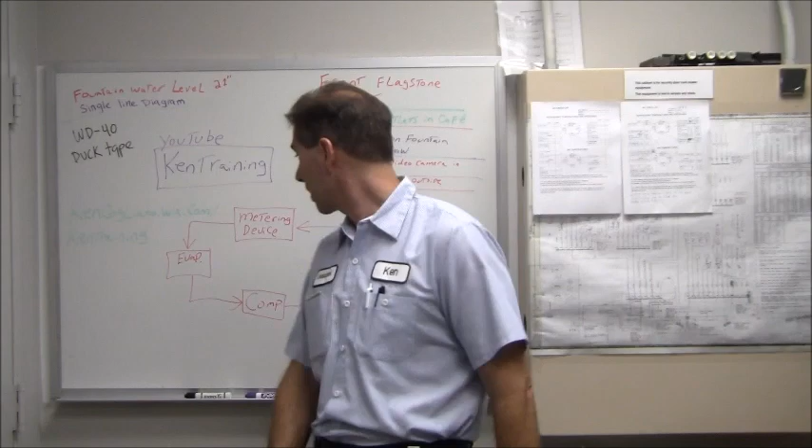Before I get into the sheet, let's go over the basic refrigeration cycle, so you have a basis of what to look for. When we fill out the sheet in the field, you need to know what components to look for in order to place your gauges and temperature probes correctly, and understand what you're trying to achieve. Every unit looks slightly different, so you have to look at the piping to figure things out. I've got the basic refrigeration cycle right here, and it's also on the sheet, but I'll give you a brief explanation.

I always like to start at the compressor. The compressor is the heart of the machine—it's the lifeblood, or the pump.

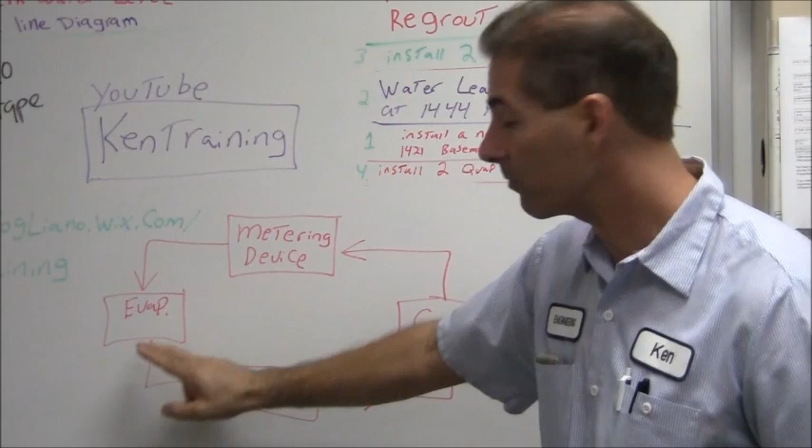Let's talk about the four main components, their names, and what each does individually. First is the compressor, which goes to the condenser. The condenser goes to the metering device, then the refrigerant goes to the evaporator, and back to the compressor. These are the four main components—every refrigeration cycle has them, otherwise it's not a refrigeration cycle.

Now let's talk about each component individually. The compressor takes in low pressure, low temperature vapor refrigerant and compresses it into a high pressure, high temperature vapor refrigerant. That then comes over to the condenser, whose job is to reject the heat of the refrigerant.

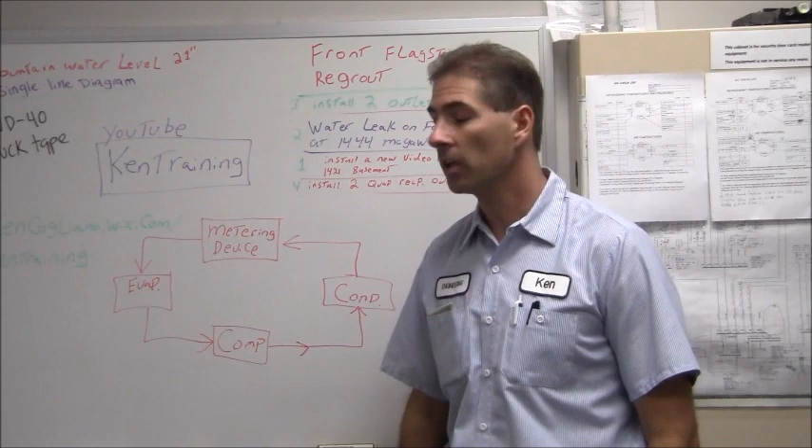From the condenser, we leave with a high pressure liquid refrigerant, traveling along the liquid line towards the metering device. If you have a sight glass, it's somewhere on this line, and it should show no bubbles, since you should be feeding 100% liquid refrigerant to the metering device. The metering device is nothing more than a restriction, because you're going from a high pressure on one side to a low pressure on the other.

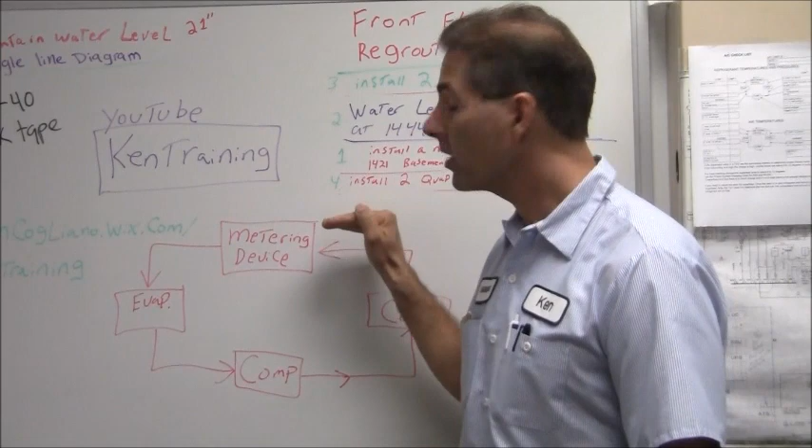Your 100% liquid refrigerant, when it travels through that restriction, 25% of it immediately flashes off into vapor. The remaining 75% stays liquid as it travels into the beginning stages of the evaporator coil. There, it boils off completely, changing all of it into vapor. Once it passes the saturation point—going from partial liquid and vapor to 100% vapor—that's saturation.

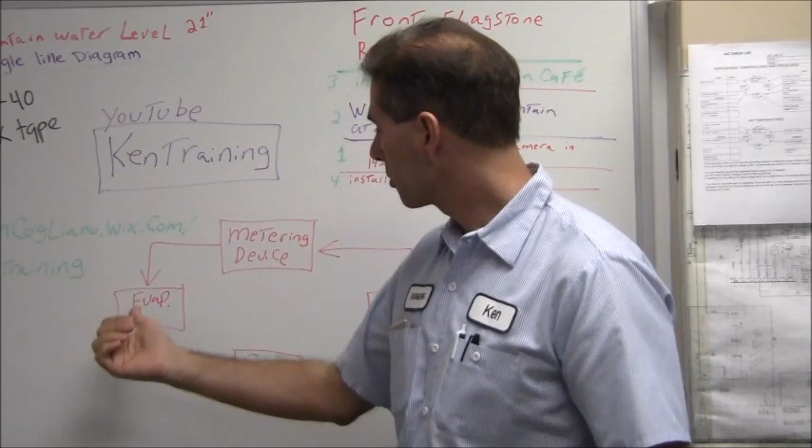As that vapor refrigerant continues to pick up heat, that's when it creates superheat—you superheat the refrigerant slightly. Then from the evaporator, that low pressure, low temperature vapor refrigerant travels back into the compressor, and the cycle repeats. That's the main components of the basic refrigeration cycle.

Now, going back to checking the charge of an air conditioning unit, I'm going to fill out my AC checklist. Let me zoom in so you can see this fairly well.

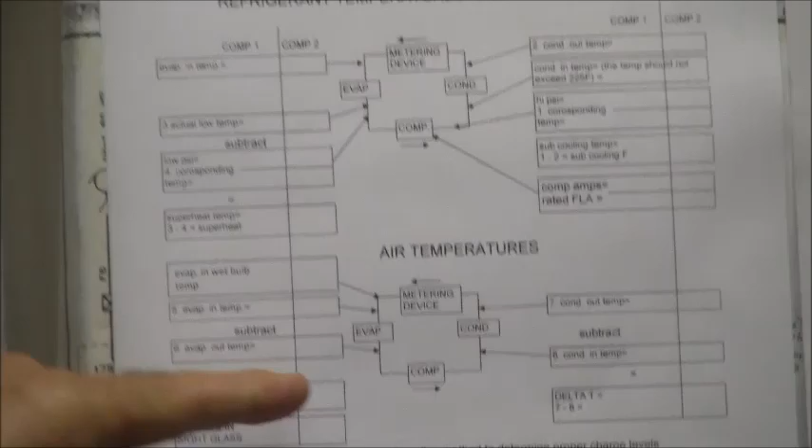You'll notice I've got two different basic refrigeration cycles on the same sheet. Up at the top, this is for refrigerant temperatures and pressures. In the bottom section, this is for air temperatures only. So it depends on what you're trying to measure at that point in time, and that's where you put it. The first item to check on the refrigerant temperatures and pressures side is the evaporator inlet temperature.

That's an actual temperature reading. I want to know the temperature of the refrigerant when it leaves the evaporator coil—that's the actual low temperature. When you have your HVAC gauges on, your low side pressure gauge goes here, and the corresponding refrigerant temperature goes right here.

By the way, the reason there's a line here is for two-compressor systems. The packaged units I have are a packaged unit with two compressors, while the split system units I have downstairs are strictly one-compressor units. So you'd only need to fill in the column on the left-hand side.

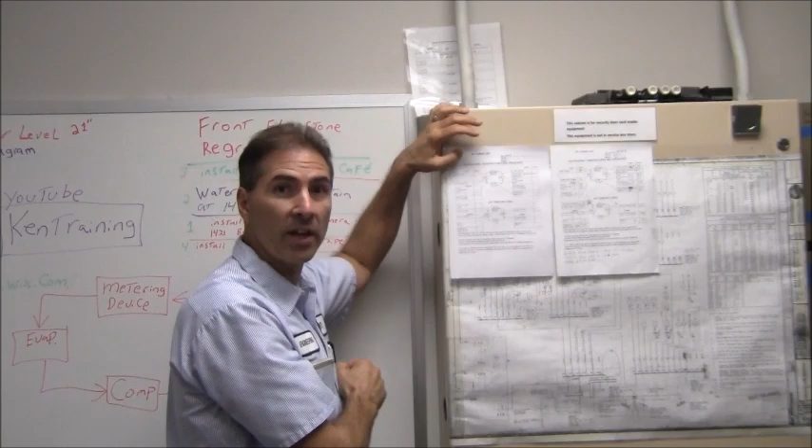Go ahead and zoom back in over here so we can go through the rest of this.

Going through the refrigeration cycle just after the compressor, I'm going to do an amp clamp and figure out what the amp reading is for the compressor. I also want to look at the data nameplate to figure out what the rated full load amps are so I can see how stressed that compressor is.

When you have your low pressure and high pressure manifold gauges, your high pressure gauge pressure will go here, and the corresponding temperature goes here. The condenser inlet temperature of the refrigerant should not exceed 225 degrees Fahrenheit, because if you're exceeding that temperature, you're generally boiling off the oil in the compressor, and it's simply going to be too hot.

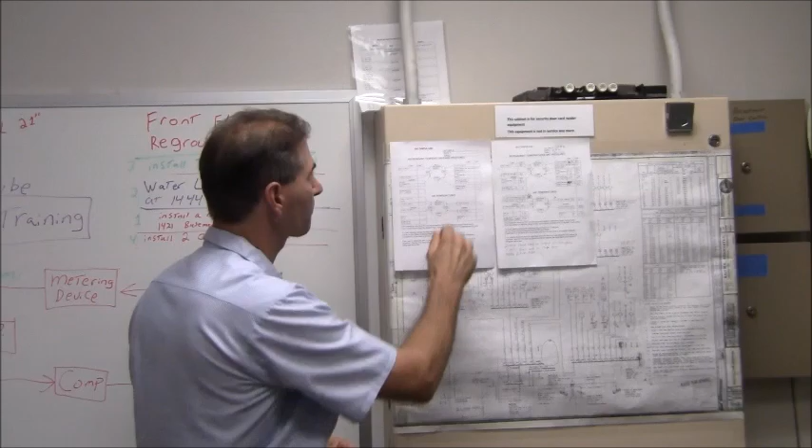So you want to watch and measure what that temperature is. Now, after the condenser, I want to know what the condenser outlet temperature is of that refrigerant, because my subcooling is going to take place right here. The calculation is built right into this cheat sheet. You take number 1, the corresponding temperature, subtract number 2, the actual condenser outlet temperature, and it tells you what your degrees of subcooling is.

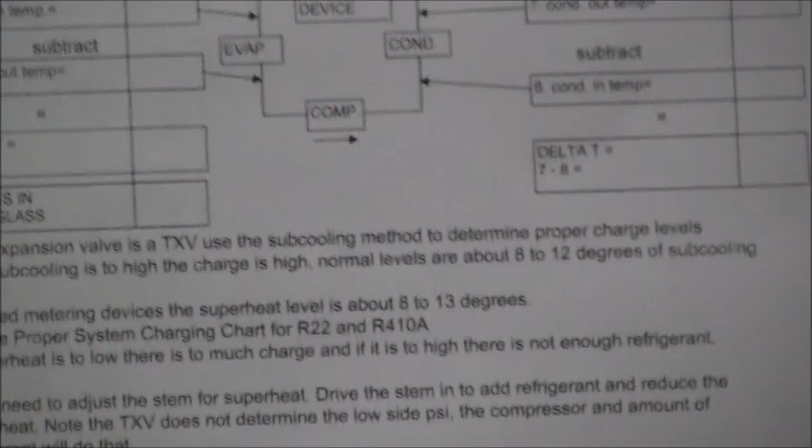Also, the superheat temperature is right here, and the calculation is built right in. If I know what my actual low temperature is coming out of the evaporator, and I take the corresponding temperature according to my low pressure gauge, you take the actual low subtracting the corresponding temperature, that gives you your superheat temperature. Then down here I have some notes about the expansion valve.

I'll go ahead and read that to you. If the expansion valve is a TXV, a thermostatic expansion valve, you're going to use the subcooling method to determine proper charge levels. If the subcooling is high, the charge is high. Normal levels are about 8 to 12 degrees of subcooling.

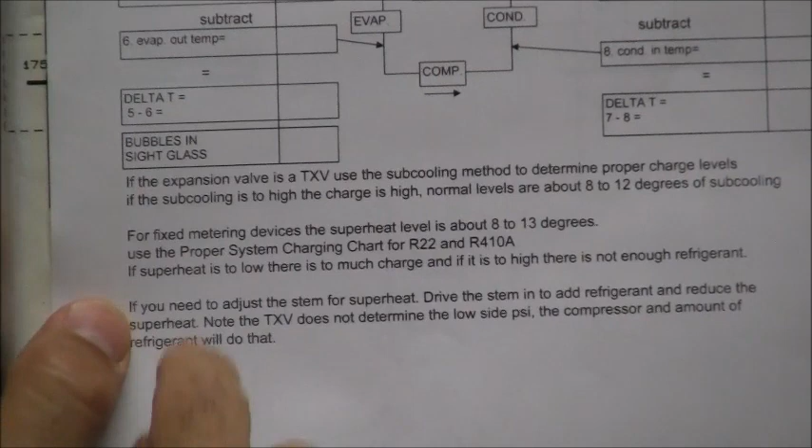For a fixed metering device such as a capillary tube, the superheat level is about 8 to 13 degrees Fahrenheit. Use the proper system charging chart for R22 and R410A. I also have a charging chart, and we'll go over that as well. If the superheat is too low, there is too much charge, and if it is too high, there is not enough refrigerant—that's why there's too much superheat.

If you need to adjust the stem for superheat, you drive the stem in to add refrigerant and reduce the superheat. Note, the TXV does not determine the low side pressure—the compressor and amount of refrigerant will do that.

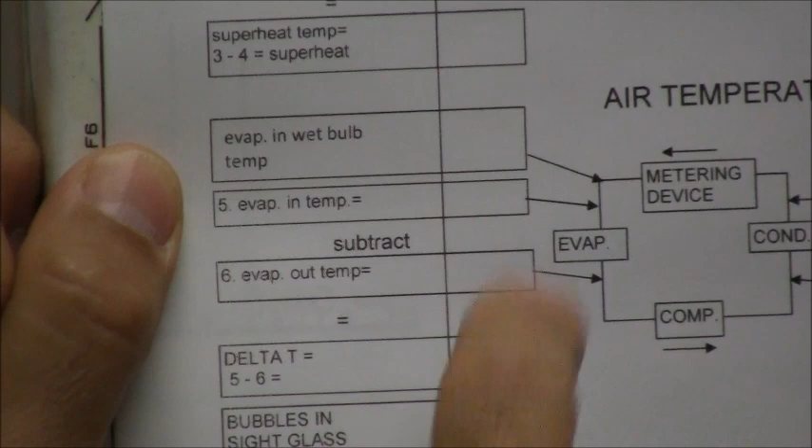Now let's talk about the air temperatures. You're going to get the evaporator inlet wet bulb temperature. If you have a sling psychrometer, or a digital one, it tells me what the wet bulb temperature is coming into the evaporator, and you'll write that temperature down. That's the temperature of the air. The evaporator inlet temperature—not the wet bulb, this will be a dry bulb temperature—you write that one in, and the evaporator outlet temperature right there, numbers 5 and 6.

You take 5 minus 6 and it tells you the delta T, and it tells you how efficient your evaporator coil is. There are bubbles in the sight glass—this is either a yes or a no indication, or N/A, which is not applicable because your unit doesn't have a sight glass.

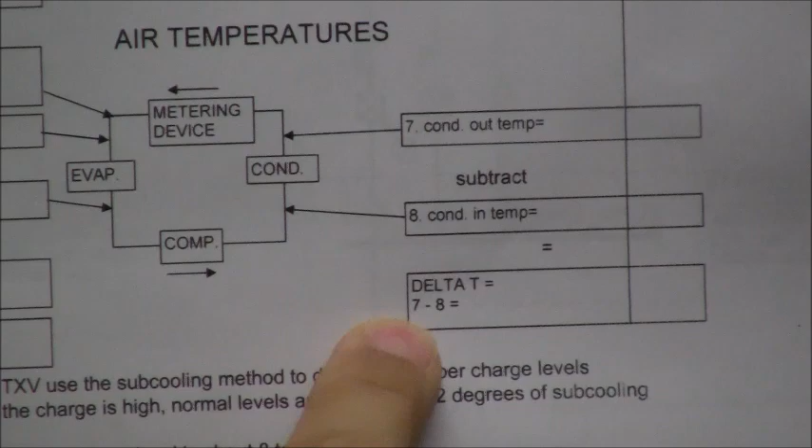Coming over to the condenser, you want to know what your condenser outlet air temperature is, and the condenser inlet air temperature. You take 7 minus 8, give you your delta T, and it tells you the efficiency of your condenser coil. Now this is the blank sheet.

Here's a system that is actually filled out, okay? Go ahead and zoom in right here. You'll see that this particular one is UPS unit number 1. The date that we did the job was 2/13/14.

So that was 6 months ago. Now, who did the job, which was right there. There's only one compressor, so what we have here is basically a before and after. Before we did the job, these are the information that I wrote down. I had bubbles in the sight glass. My low side pressure was at 34 pounds.

I looked at all the information here, and I determined that what I needed to do was add refrigerant into the system.

I also did a leak check on this one, and I found a leak on the sight glass. I actually did a whole video on this one.

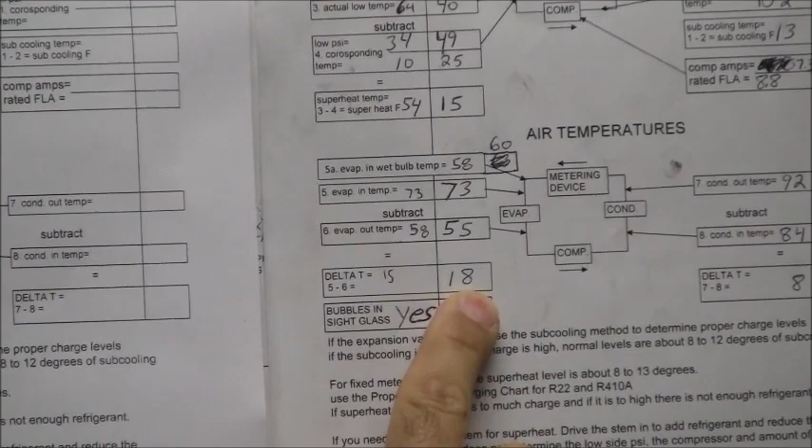As an example, on the evaporator coil, before we started, I actually had a decent coil. I had a 15-degree split coming out of that coil, but when we were done, I had an 18-degree delta T on the evaporator coil.

It really showed up though in the condenser on this particular unit. Before we found the leak and charged it, we only had a split of 8 degrees Fahrenheit on the condenser coil. After everything was done, we got a 17-degree split, which is an excellent efficiency going across that coil. And at the end of the job, we had no bubbles in the sight glass.

We'll probably put gauges on this unit today so we can get a good comparison of where we stand on that unit today. So I just want to give you a little bit of classroom time, since this is a quiet environment. We are going to have to go and do it actually at the units, and we're going to run the compressor, so you're going to have that compressor buzzing in the background, and I can't avoid that.

One other thing, on my package units that have 2 compressors, when I go to fill out my sheet, you see compressor 1, compressor 2, I am going to make sure that I'm only running 1 compressor at a time. I'm going to lock out that second compressor because I can't have 2 compressors running simultaneously, because I won't be able to determine which circuit is giving me good temperatures and pressures.

So I won't get accurate information. For me to be accurate, when I do my system check, I can only do 1 compressor at a time, get all my pressures and temperatures, and then shut that compressor off, move the gauges over to the second unit, and then do the same thing over there, so I can get the health of each circuit.

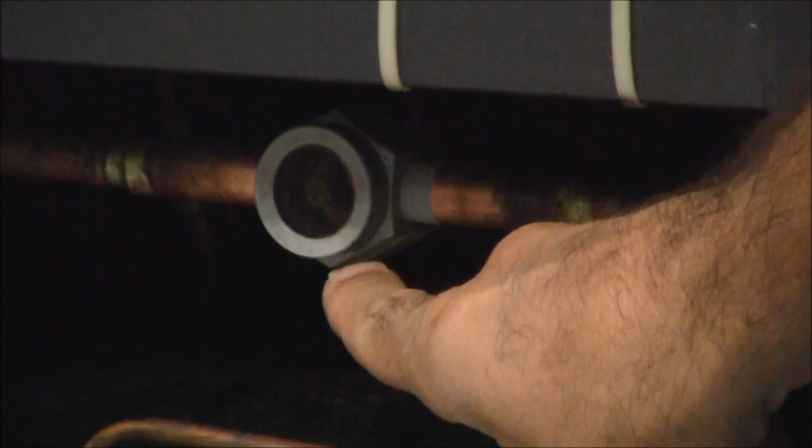Now over here is your compressors. This is compressor 2 right here. Hopefully the camera can pick this up, but there's a sight glass right here. I haven't even put gauges on this unit yet, but I've been running compressor 2 for a couple of minutes. I got no bubbles in that sight glass, and the compressor is running without even putting gauges on the unit. This unit is looking like it has a full charge to it right now.

Now I have a thermometer over here. We're going to show that to you. Okay, this is a dual thermometer. The top one tells you the room temperature, or the temperature right here at the thermometer, is 72.5 degrees. The bottom one tells you the supply temperature, because I got it right in the supply run where the air comes underneath the floor, and that temperature is 66.8.

So let's just kind of round it out. Let's say it's 66.5. So all I'm getting here is a 6 degree split. Now a 6 degree split is not a great split, but this is a very old unit. This particular unit's over 20 years old. That may be all this is capable of. If I'm getting 6 degrees out of that, if I did the same with the top compressor, I'd get a 12 degree differential total. That's not terrible. If you can get a 15 to 20 degree split, that would be number one, but this possibly may be the best that this one can do.

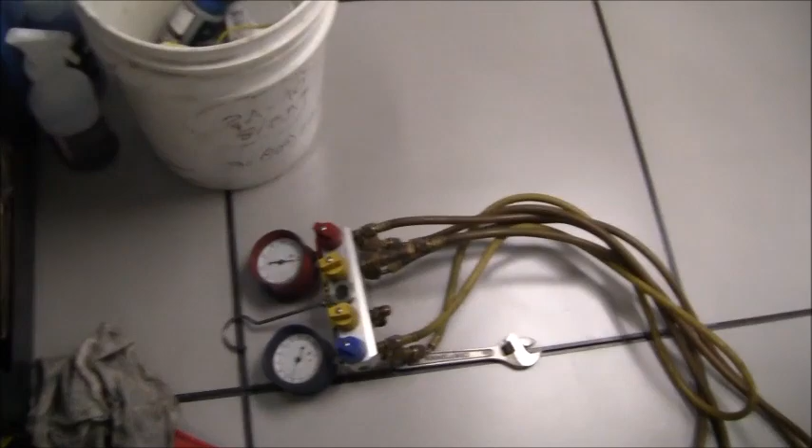Now, here's my HVAC manifold gauges. I've got low loss fittings on there, but because of this pipe right here, I'm going to have to take off my low loss fitting and kind of bend that out of the way a little bit because it's such a tight fit. It's going to be very difficult for me to get on there, but I didn't build the unit, that's the way it is. So this is the suction service valve right there.

Alright, so we're going to get ready to put these on right now. We're going to get on the high side first. I'm wearing gloves and I have safety glasses on for personal protection equipment. First thing I'll do here is go ahead and take that cap and loosen that up. See if I can get it with this. If you can, you always want to use the smooth jaw rather than the serrated jaw, so it doesn't flatten out the hexes on your caps. So if you have a choice, you want to try to use the smooth jaw wrenches.

All right, so that's that. Now when I'm ready, after I put that on, I'll use this service wrench. First, I'm going to take my manifold gauges and make sure all my valves are hand-tight closed. I got no pressure inside on my high side, so I'm going to have to give that a purge. I'm going to take it off from the low-loss fitting, take the cap off back here, and screw that onto the Schrader valve.

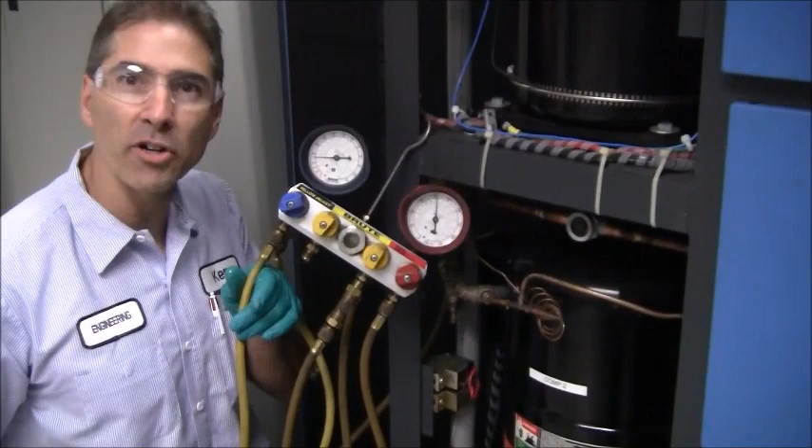This is filled with R22 now, and my pressure is about 205 PSI. You can see that right there. Now I got to go over and do the low side. I got a little bit of pressure in there, so I'm going to purge that out right here.

Okay, now we want to get on to the low side, blue side of the service valve. First thing we're going to do, take this cap off. Take off the cap for the Schrader valve. And now I'm going to try to screw this on.

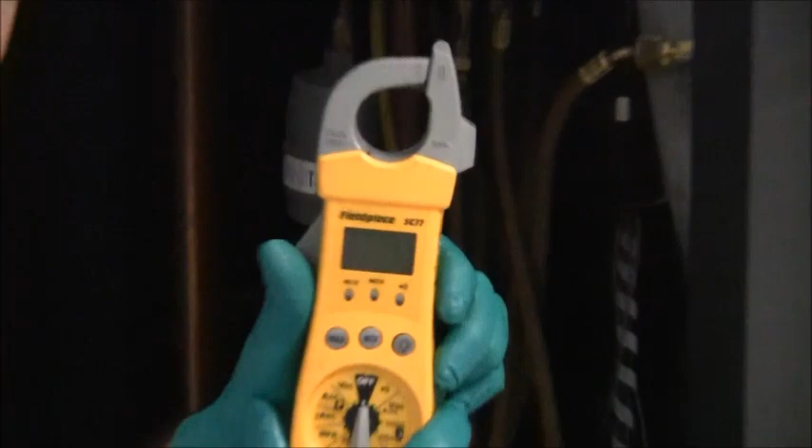Now, for the tools that I'm going to use, my Fieldpiece SC77 meter with the temperature adjustment, which goes in here. This is the thermocouple temperature attachment. Plus I have this one here that clamps onto pipes, and this one has the same attachment that goes in right here.

So what I can do, since I know that I'm going to want some of these refrigerant temperatures, I can go ahead and put this on a pipe clamp right now to get it acclimated. I know that I want the compressor out going towards the condenser. That's one of my refrigerant temperatures.

This here is the compressor discharge. It comes up and it goes across to right here. So I'm going to just put that on there right now and let that sit for a moment.

Now the first thing that I'll write down here is the low side and the high side. So the low side gauge is 64. So I'll take this

in under refrigerant temperatures and pressures. The low side is 64 PSI. I want the corresponding temperature.

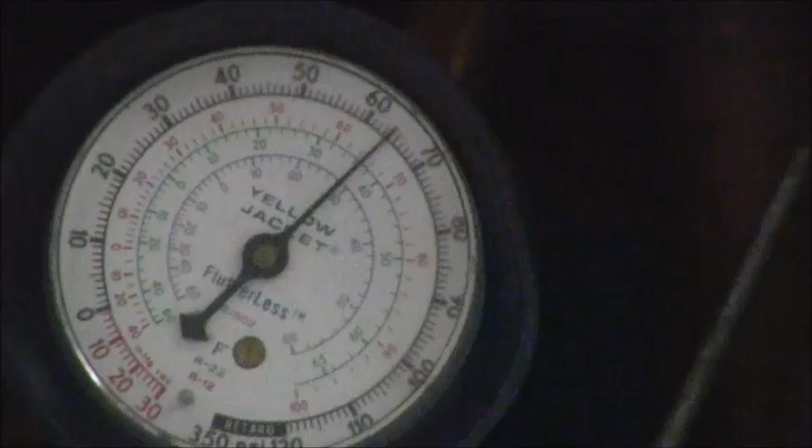Now, I know the refrigerant is R22. When you're looking at the gauge, R22 is the one that's in green. You'll notice the scale where the needle is tells you that it's 37 degrees Fahrenheit is the corresponding temperature at that pressure. So that's the number you write down, 37. 37 goes right here, corresponding temperature.

Now I'm going to do the same for the high side. The high side pressure is 210. The corresponding is 105. So that's what I'm going to write down, 210 and 105. They go over here. High side pressure, 210, corresponding

105. Now, I've got my temperature probe on the discharge line. So I take my Fieldpiece, put that in, put that on temperature right there, and that tells me the temperature of the discharge line after the compressor going towards the condenser. The refrigerant is 180 degrees Fahrenheit. That goes right here, 180.

Oh, actually this is all for compressor 2, and I started writing this in compressor 1. I should have kept it in sequence. What I'll do to make myself straight is I'll just write down compressor 2 so I don't get confused. So this is all compressor 2's readings.

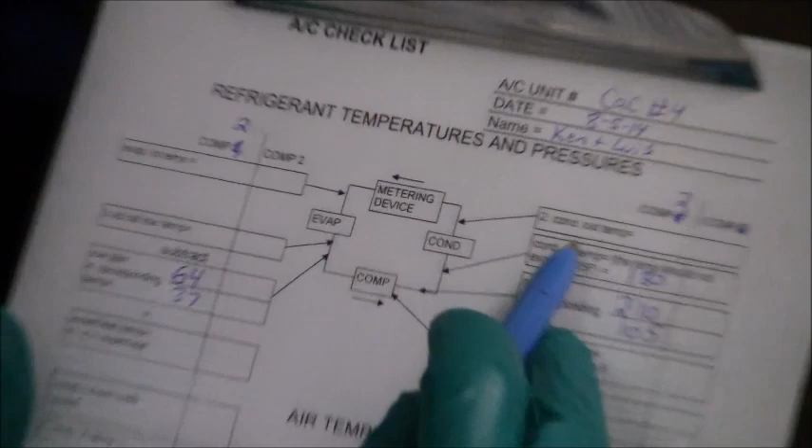Okay, now I need to know the condenser outlet temperature, and I need to write that number down right here. When you follow your refrigerant flows, I'm going to follow the pipe, and the refrigerant goes into the condenser. This is a water-cooled condenser, but it goes in right there. So when it comes out this

temperature, you just have to follow your piping to figure that out. Now let me put my gauges up here for now. I'm going to plug this back in. And there's your temperature right there.

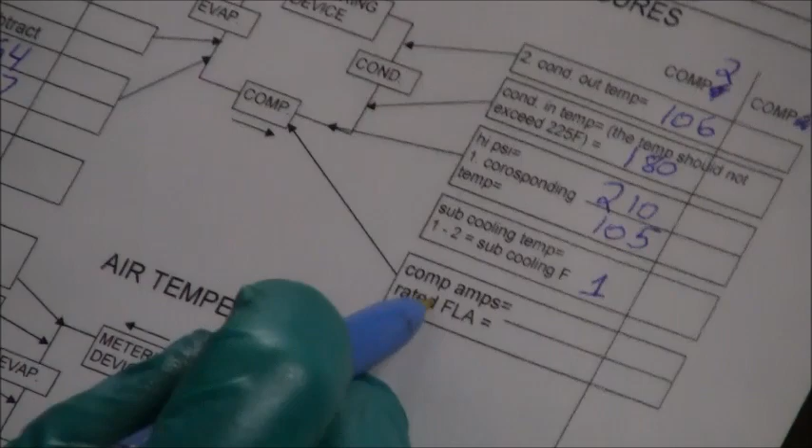Now the next line down is the compressor amps and the rated full load amps. So first thing I want to do is write down the compressor rated full load amps. You get that from the data nameplate. All right, the data nameplate is right behind this door.

Here's the data nameplate for the unit right here. It tells you the model number, the serial number, and it gives you the electrical ratings. What I'm interested in is the compressor. I'm working on compressor number 2. The run load amps is 15.8 and the locked rotor amps is 91.1. The number I want to write down is 15.8. That's the full run load amps. So 15.8, you write that down right here. Rated full load amps.

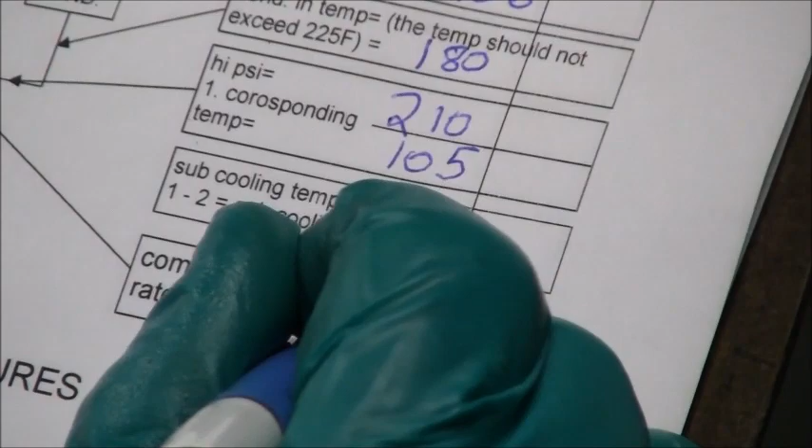Now, I want to know the actual amps that the compressor is running. So I'm going to shut that, pop this up, get my meter, and come over here to compressor 2, get on these lines, and write down that number.

So what you do is take your meter, put it on amperage, which is that tab right there, and now I'm going to put the clamp around one wire at a time. I've got a hold button here so I can show it to you. Okay, so that one there is 11.8.

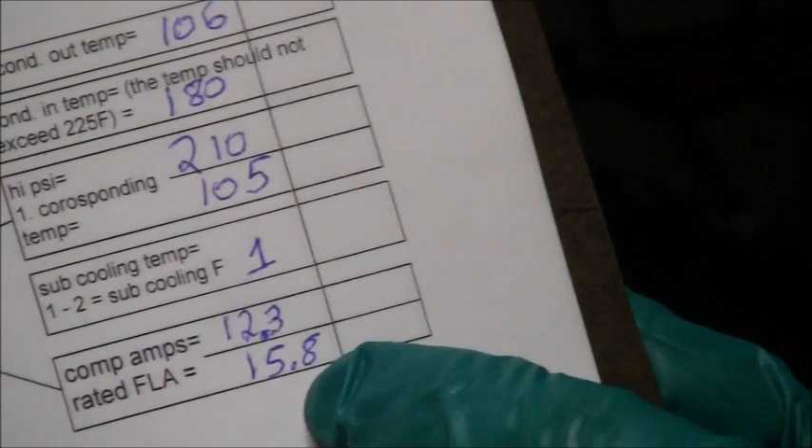So what you do is you write that down right here. Compressor amps 12.3. My rated full load amps is 15.8. The compressor is only pulling 12.3. This compressor is not stressed. Electrically, it is not stressed. So I'm going to go ahead and shut this.

And I want to continue on with my temperatures. I'm going to stick with the refrigeration cycle. I already filled in this side. Now, I want to know what the evaporator inlet temperature is. To get the evaporator inlet temperature, you got to get it after the metering device.

For compressor number 2, it comes down here, goes through a solenoid valve, goes through the thermostatic expansion valve, branches, and then goes into the coil. The temperature I'm looking for is the temperature right after this thermostatic expansion valve.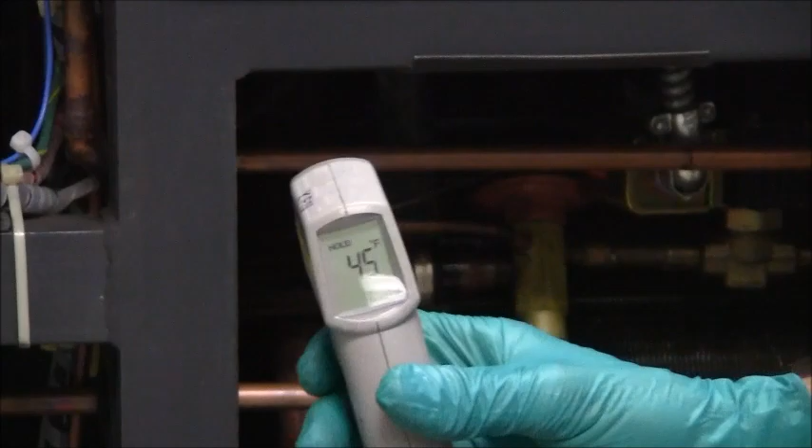So I'm going to take my infrared gun and put that right on the coils there, figure out what that is. 44 degrees Fahrenheit. I'll try that again. At 45, so 44 is the number I'm going to put in there. So that number goes right here, the evaporator inlet temperature.

Is 44. Now, if you didn't have this tool, another way you could do it, but it's not as accurate, is to take a Fieldpiece, throw on your thermocouple, and then right here at the end, you want to touch that right to there, but you don't want to have your finger on it because you don't want the heat from your finger. So what I'm going to do is take a rag and put it like this.

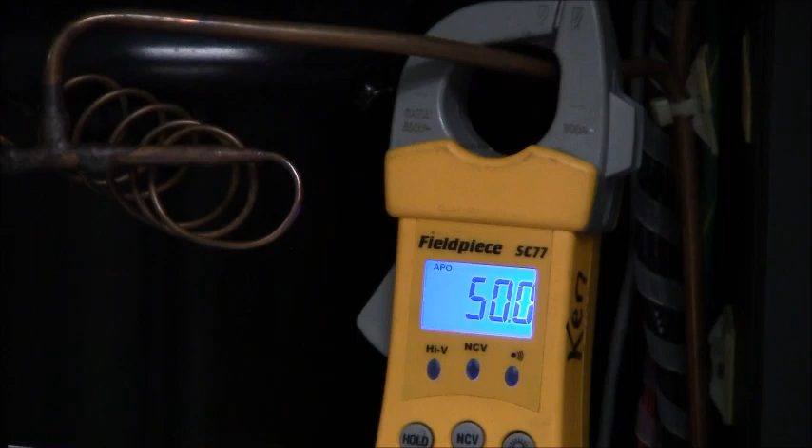And let's see what that drops to. 48 is one of the numbers that I saw. Let me see if I can get a better grip here. This is just to give you a comparison. 47. So you can do it that way, but it's not quite as accurate as the way you saw with this tool. So if you want to have one of these in your arsenal as well.

So let me go ahead and put this door back on. Now, let's continue on. The actual low temperature, let me show you how to get that.

Alright, so here's the suction line right here. This particular one is all insulated with that cork tape. I don't want to mess with that. So I'm just going to zap this.

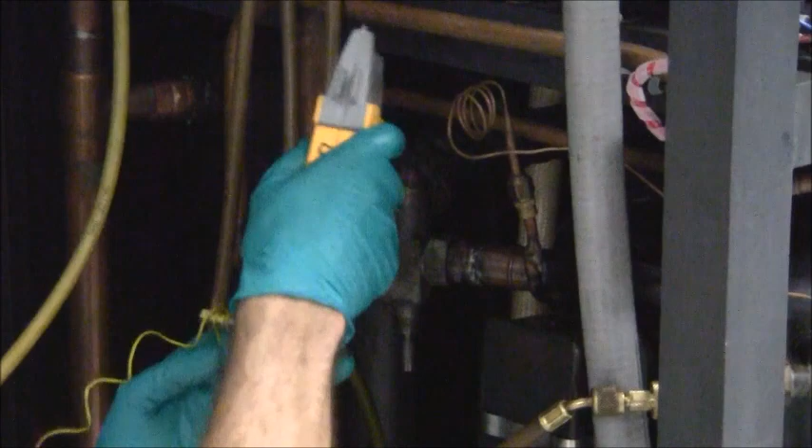I was getting 70, 75 degrees out of there. Let me check one other thing. What I'm going to try to do is put this underneath the insulation and try to get a temperature that way. So let me throw this here.

See what that temperature is. It's pretty close to 77 degrees. So okay, the other one was 76. So the actual low right here we're going to put is 77. To get the superheat, you take number 3 and subtract that by number 4. So it's actually 40 degrees.

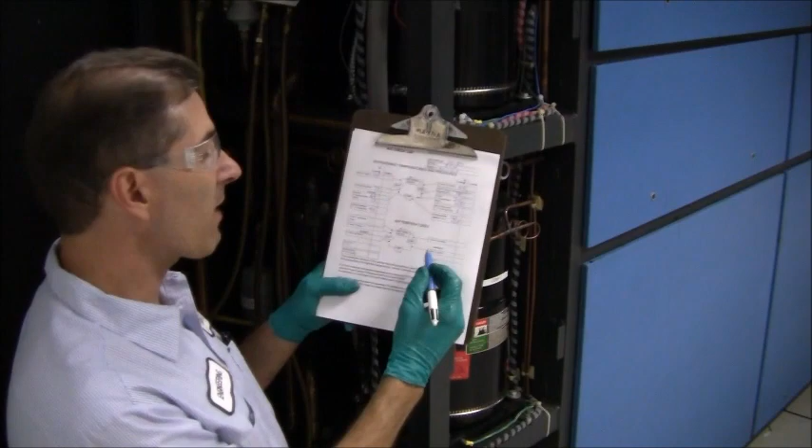That completely takes care of all the refrigerant temperatures and pressures. Now we're going to move over to air temperatures. Since I'm right here, I'm going to start with the condenser. But my condenser is actually a water-cooled condenser, so I got to write down the water inlet and outlet temperatures.

I'm going to try to use my pipe clamp. Now, on the condenser, I'm going to feel the two pipes here. The one that's colder is the inlet, the one that's warmer is the outlet. So I'll start at the outlet.

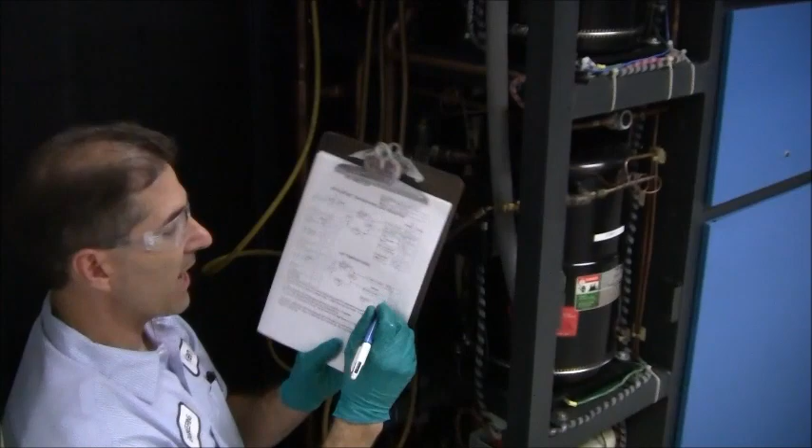You subtract it by 75, and that tells you how efficient your condenser is. So we're getting 14 degrees.

Now let's move on to this side over here. The next thing we want to get is the evaporator inlet temperature, so that's the return temperature.

To get the return temperature, the air goes down this way on the top. So I'm just going to take this and get a number here to see what the air temperature is going in. Now, by the way, another thing that I did in this data center, because I wanted this unit to work, I took the other units and raised the set points to force this unit to work harder. So that's why this temperature is actually a little warmer than normal.

So right now this is about some numbers in the 80s, 79, 78. Over here I'm getting a higher number. I'm just going to call it 79. So the inlet temperature is going to be 79, the evaporator inlet temperature.

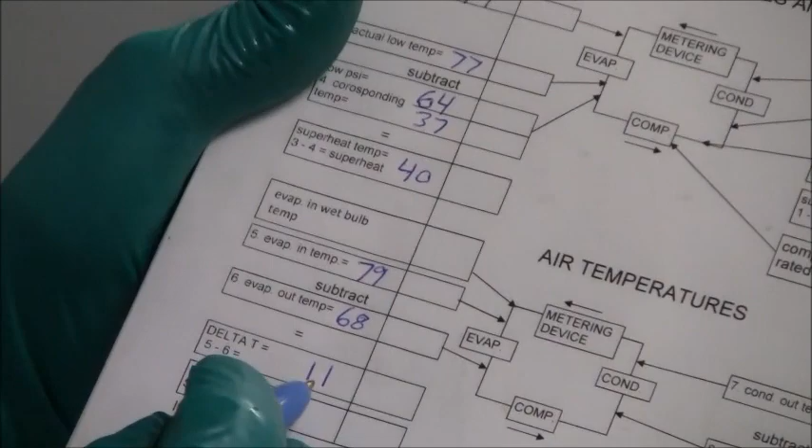So in order to get the delta T, you take 5, which is 79, you subtract that by 68, and you get 11 degrees. So I'm getting a pretty decent split out of the evaporator. I'm getting a 14-degree split out of the condenser. Both of those are good.

Now, are there bubbles in the sight glass? The sight glass is right here. There are 0 bubbles in the sight glass. So, bubbles in the sight glass, the answer is no. There are no bubbles in the sight glass.

The only one that I didn't write down is the evaporator in wet bulb temperature. Now, looking at this data, this is telling me that I've got a reasonable degree split across the evaporator of 11 degrees. So that's like a green check mark saying that that's good. I'm getting a 14-degree split across the condenser. I'm going to give that a check mark.

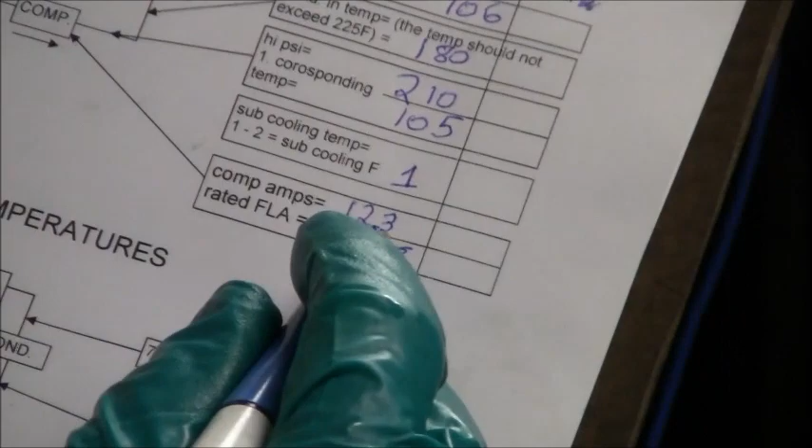That's good. My compressor is running at 12.3 amps when I can go up to 15.8. That is good. My compressor is not stressed. The suction and discharge temperatures are good. My temperature of the refrigerant leaving the compressor is 180. It's not over 225, so that's good right there.

All in all, the charge on this unit is good. So you come up. All right, so basically, that's how you put the gauges on the unit. That's how you fill in the checklist here to determine if you think that there's something wrong and you want to check the charge on your unit. This is the process that you go through.

If I want to, I can go ahead and we're going to shut compressor number 2 off. We're going to turn compressor number 1 on. And we're going to check that to see what some temperatures are, and if needed, we will put manifold gauges on it to further diagnose if we think that there's a problem. If we don't think there's a problem because we're getting good numbers, we're just going to leave that alone.

One other thing that I'm going to do is I'm going to go back to my history and I'm going to look at CRAC number 4 and see what the numbers were 6 months ago. All right, here we are. This was done on 2/19/14, CRAC number 4. On compressor number 1, I was getting a delta T of 11 degrees Fahrenheit.

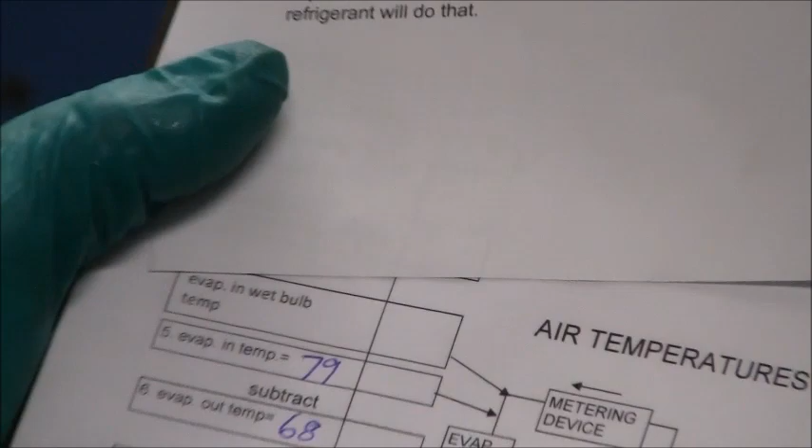That is exactly what I'm getting right now, 11 degrees. On the condenser, I was getting 13. Right now I'm getting 1 degree better, I'm getting 14. There were no bubbles in the sight glass then, and there's no bubbles in the sight glass now.

So having the history sheet is extremely beneficial, because now I can use that as a cross-reference to say, okay, I got my numbers, let's see how well we did last time as well. And this circuit is very healthy. It sure looked like that stop leak material that I put in there worked really well.

Let me show you where that leak was located and why a traditional repair would have been a little bit hard. Alright, so here's the unit, and here's the tubes of the coil, of the A-frame coil. The leak was actually, it's very difficult to see this, but it was actually way back on the other side over to there. And it would have just been days and days to repair that.

Yeah, that leak would have just been a nightmare to repair with a traditional repair, because we couldn't gain access to it. We would have had to pull the refrigerant, pull the coil out of the unit, then fix it, and then do some type of a makeshift piping arrangement so we could leak check it, put it back in, weld it all up, leak check it again, evacuate it, and then recharge it. It just would have been a huge amount of work.

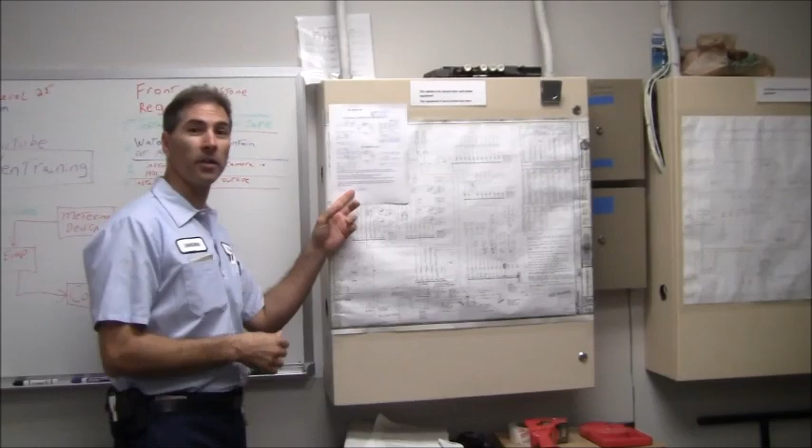Okay, I wanted to go over the findings in a classroom environment where we were not around the air conditioning unit. It's a lot quieter here. So let's zoom in on the checklist here, and we're going to go through what the results were.

Now, mind you, compressor number 2, that was the circuit that I had originally had a leak in, and we added some leak stop and some extra refrigerant 6 months or a year ago or so in order to bring it up to charge. Now, in today's world, this is also a TXV unit.

Now, right here on the cheat sheet, it tells you that if the expansion valve is a TXV, you're going to use the subcooling method, which normal levels are about 8 to 12 degrees Fahrenheit of subcooling. But you'll notice that the subcooling level is only 1. And I am not concerned that that number is that low. I am not going to make a change in the system because of that very low subcooling number.

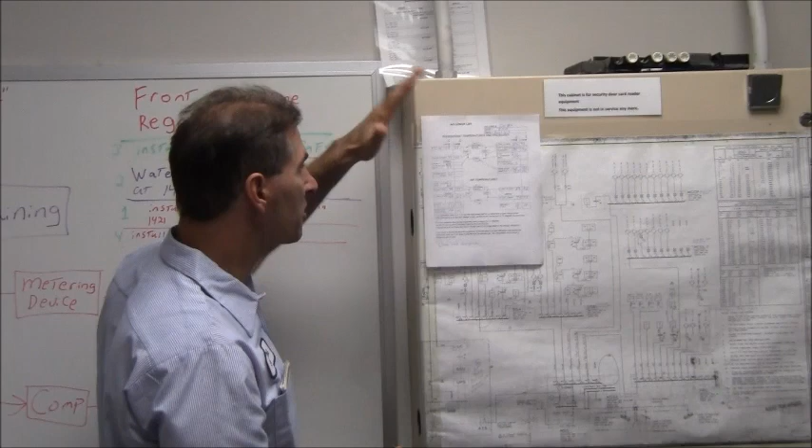And I'll tell you why. It's possible that it's just not, it could be slightly off by a few degrees. Plus, I'm looking at everything else to determine. Now, a low number on the subcooling would tell you that you're low on charge, but my pressures are actually pretty good, with a low side of 64 and a high side of 210.

What else is telling me that my charge is pretty good? Well, I've got no bubbles in the sight glass. Since I've got no bubbles in the sight glass, that's telling me that I've got a full liquid head hitting that metering device, so that's telling me that I've got a pretty good charge right there.

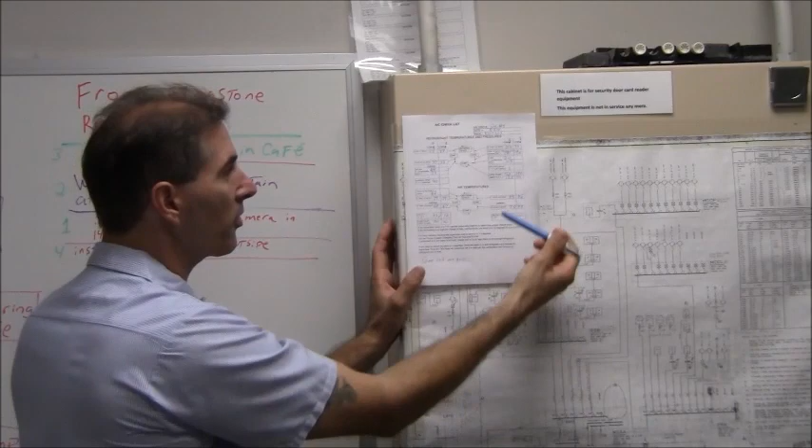Rather than just take one individual thing, what you want to do is look at everything as a whole. I know that the compressor is not stressed, so that's not going to be an issue. I know I've got no bubbles in the sight glass. Pressures are somewhat within line, very normal pressures. I've got a pretty good delta T going across the evaporator and across the condenser.

So with all of that in mind, is there a reason to change the charge on this unit, even though the prevailing thing that you want to go by is the subcooling method on this unit? The answer is no. This necessarily doesn't need to have anything changed.

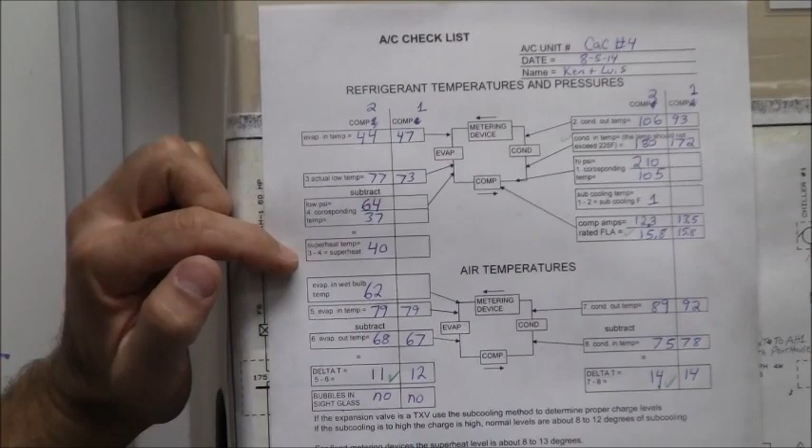Now, one other note that we could note here is that the superheat level is pretty high. The superheat level is 40 degrees, and that's a pretty high superheat level. But on this particular unit, in order for me to get that number, I had to do an actual low temperature measurement, and that particular pipe had cork type insulation on it. So I really don't think that number was 100% accurate.

Because I don't think I really got a good actual low temperature, that's going to skew off that superheat reading. I bet you that actual low temperature was a little bit colder. But considering that I had an 11 degree Fahrenheit split going across the evaporator coil, which is a pretty good split for this, this unit's 20 years old, so this is a pretty old unit.

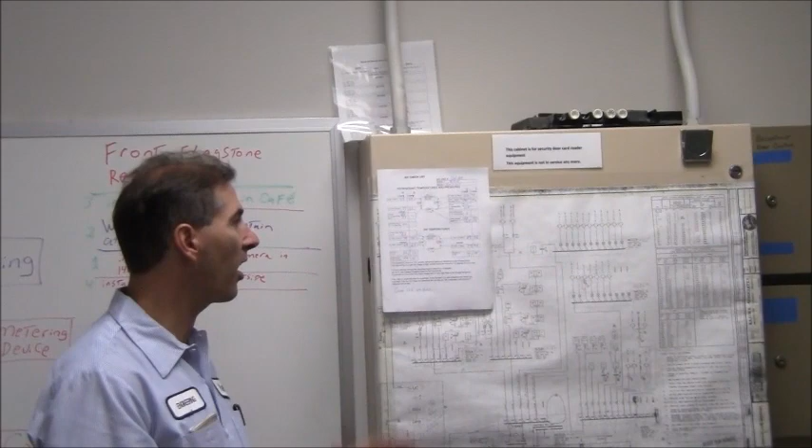So considering all, taking everything into consideration, I'm not going to make any charge adjustments. So I made a note down here: compressors 1 and 2 are good, meaning that refrigeration circuits 1 and 2 - I just refer to them as compressor 1 and 2.

Both circuits are good, so I'm not going to make any adjustments. Now let's talk about the second circuit, which is for compressor number 1. I've got compressor 1 column right here.

I did not put HVAC gauges on circuit number 1, that's why a few of these boxes are not filled in. But the readings I could take, I took with my thermometer. I got an evaporator inlet temperature of 47 degrees, an actual low temperature of 73 degrees. Now this is refrigerant temperatures: 93 degrees is the condenser outlet temperature, and after the compressor, before the condenser, it was 172 degrees, which is good.

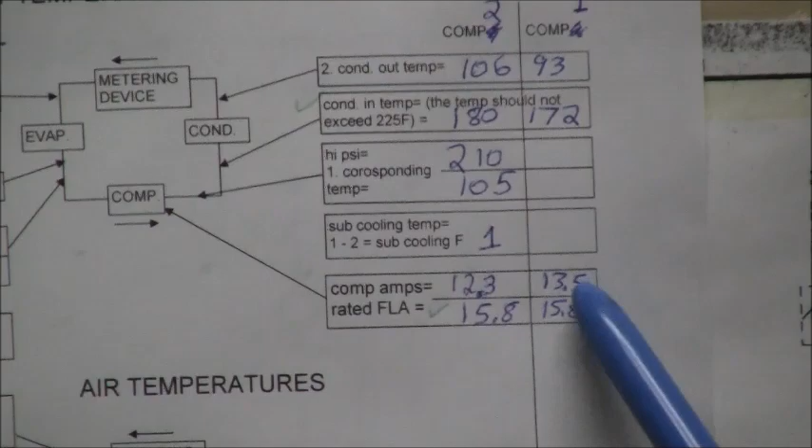Now I took an amp reading on the compressor. The full load amps is 15.8 and I got 13.5, so I know the compressor is not stressed.

Now let's look at the air temperatures. The evaporator inlet was 79 and the evaporator outlet temperature was 67. Mind you, this is just about the same as circuit number 2 - almost identical numbers. I got a 12 degree split and no bubbles in the sight glass.

On the condenser, I was getting 92 on the outlet, 78 on the inlet, and got a 14 degree split, which is identical to circuit number 2. So considering there's no bubbles in the sight glass, I'm getting good delta T's here. My compressor is not stressed.

Taking this all into account, I did not even see a reason to put manifold gauges on the unit because everything is operating as it should be. So I didn't take the steps necessary to put the gauges on there and write down those suction and discharge pressures, because I can tell the system is already doing a good job. With all the information readily available to me without even putting gauges on, I can tell the circuit is properly charged.

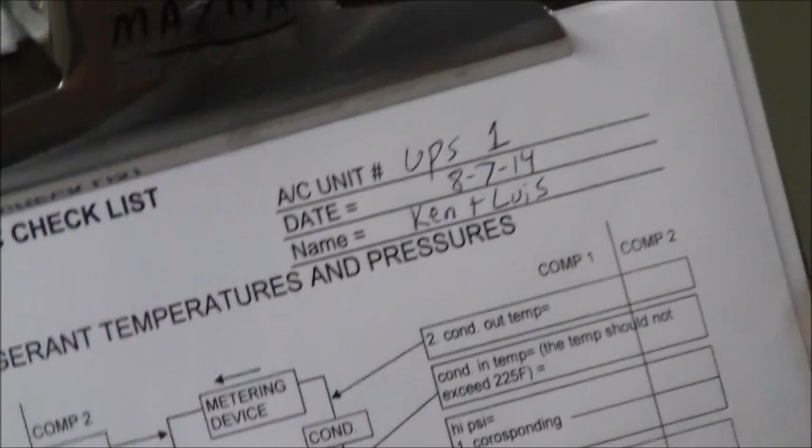The first one I'm going to get is this temperature right here. That temperature is a refrigerant temperature, and it is after the evaporator. It is the actual low temperature. I'm going to put that number right here. It's 64, but it's still dropping. I'm going to call it 63.

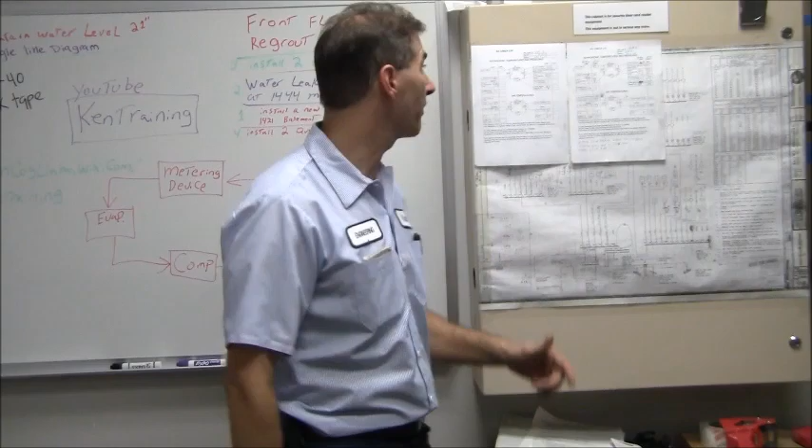I've got my AC checklist from today right here. Now, 6 months ago, I have my AC checklist as well, with a before column - that was before I did anything. I got my initial readings, and after I found that leak, I wrote it down: 2/14/14, found leak on liquid line sight glass, tightened glass, no leak found now, and I added 6.8 pounds of R22. You're supposed to keep a refrigerant log so you know exactly how much refrigerant you're putting in the unit, which I do. I keep a log of this stuff.

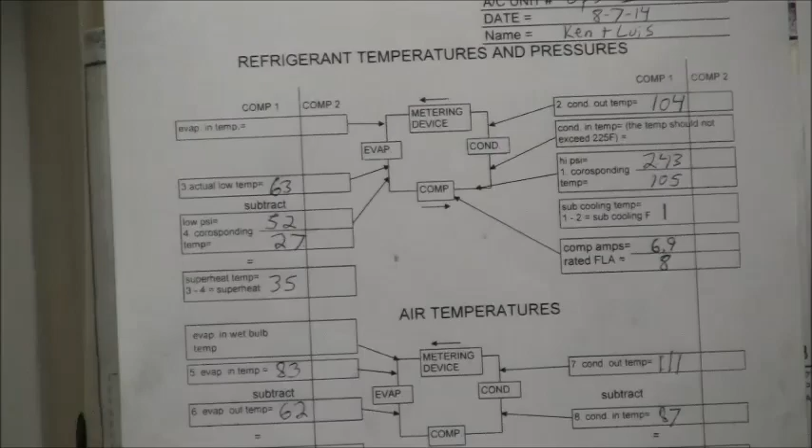Now, on the after side, after I put this in, I wrote down my readings. Now I can compare those after readings to the readings I got today. Let's start with bubbles in the sight glass. When I was done after my charge, I had no bubbles in the sight glass. Today there are bubbles in the sight glass. That's given me an initial feeling that I've lost some refrigerant.

Now you saw on camera that I checked with my big blue right around the sight glass, which is where I was leaking last time. That is not my area that I'm leaking refrigerant.

Now let's go over the rest of the numbers. Let's go with the compressor amperage. Today I got 6.9 amps. When I was done last time, I had 7.3 amps. So the load on the compressor has slightly decreased. That's a second indication of a loss of refrigerant because the compressor is not quite as stressed.

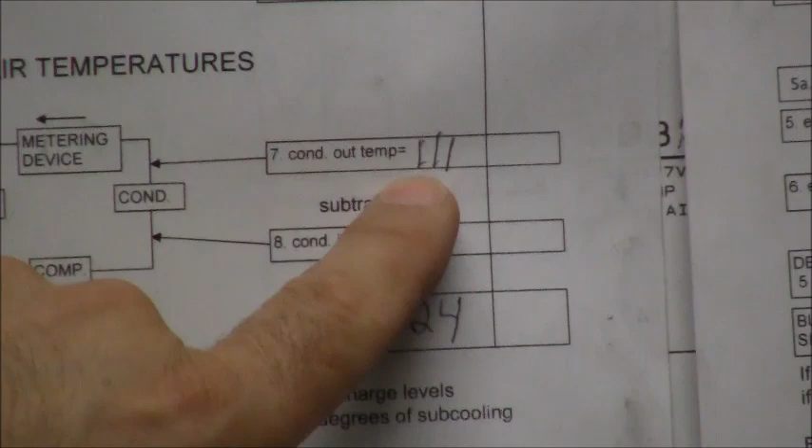Now, an interesting thing is if you look at the evaporator inlet - actually, let's go over to the condenser. The condenser outlet temperature is 111 degrees Fahrenheit. Let's go with the inlet - it's 87. Last time the inlet was 84, so I'm actually 3 degrees Fahrenheit warmer on the condenser inlet. Usually with that warmer temperature, that would be representative of more load on the compressor. My compressor with a warmer temperature compared to 6 months ago is actually pulling less amps, further indicating that there's something going on with the refrigerant circuit.

Okay, what else do we have to look at? Let's look at the all-important superheat number. This is a capillary tube metering device. The last time I did this, I got a superheat of 15 degrees. Now I'm getting a superheat of 35 degrees. That's 20 degrees warmer than last time - a third indication that this system has less refrigerant in it than it did 6 months ago. What else can we look at?

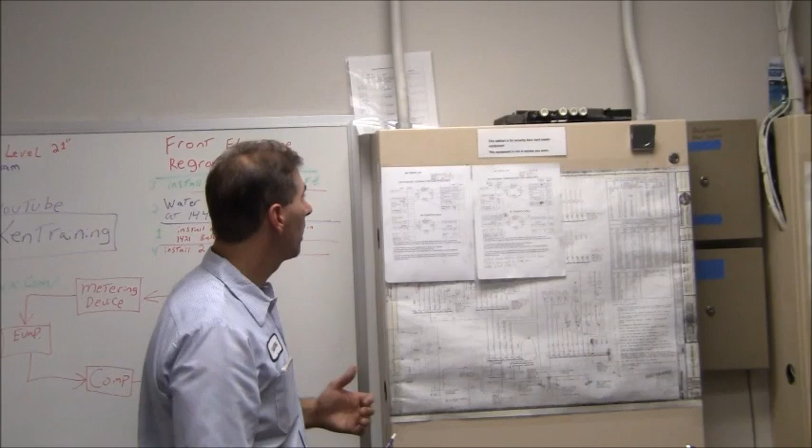Interestingly enough, I'm still getting a great delta T going across my evap coil of 21 degrees. I consider that fantastic. Last time I only got an 18 degree split going across my evap coil, so it's ironically running more efficient now than it was 6 months ago. My condenser is giving me a delta T of 24 degrees, which is a great delta T, and last time when I left this unit it was only 17 degrees.

What I believe is this: I believe I've got a small leak in the unit. I've lost some refrigerant. The ironic thing is that right now the refrigerant loss is not so great that it's upsetting the unit. The unit is still actually operating great, giving me great delta T's across both my evap and condenser coils. But because I'm looking at these three indications telling me that I've got a leak, I am at this point going to shut this unit off.

I'm going to take my halogen H10 and go around and sniff to see if I can't find a leak, and hopefully I will find one. This is a pretty good split system, it's got a pretty good distance between the two coils, like a 60-foot run in between. I'm going to start at the condenser and work my way back towards the evap coil to see if I can't find anything. If I do find anything, I'll do my best to put that on camera.

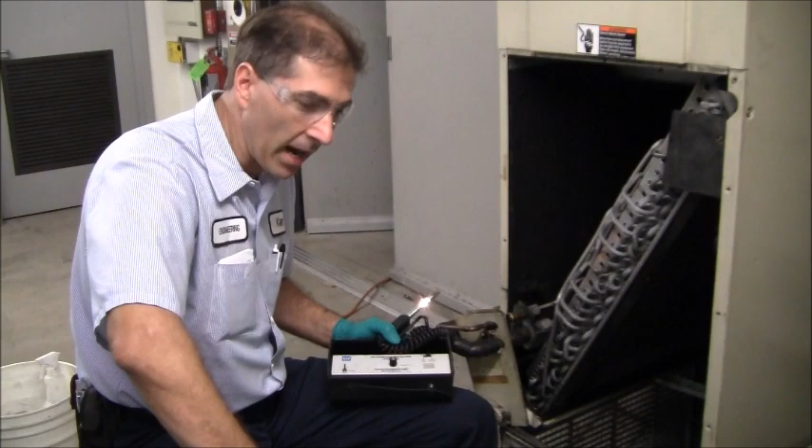I actually started over in the condensing section, took apart the panels, and used my halogen H10, which is this leak detector right here - a halogen leak detector, type H10A, so I just refer to it as a halogen H10. The refrigerant I'm working with is R22, so this goes on the right-hand side for R22. There's a sensitivity adjustment here, and I usually keep my adjustment like this, so that it's beeping. The camera might not pick this up, but there's a speaker here, and it makes a ticking sound. But I've got this UPS behind me, so there's a lot of ambient noise here - you might not be able to hear it, so you've got to go by this.

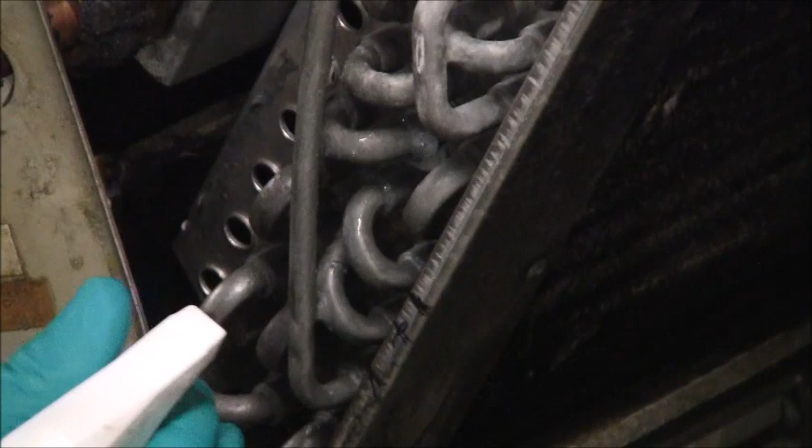Basically what I was doing was just going in here like this, waiting for this thing to light up and listening for it ticking. So then I came to this area here, and I just took my black Sharpie and said, okay, I know I've got something going on in this area. So then what I did was take my can of Big Blue, this product right here, Big Blue leak detector solution. I got it set for spray, and I came down and sprayed over here because I didn't know exactly where the leak was at.

Now we'll reposition the camera and show you the leak. Alright, there you go - there's the leak right there. Now let me give it a spray here so I can show you. And you can see that bubbling right up there, so you know the leak is exactly right there, okay?

Okay, now that we know where the leak is located - this is an aluminum coil. The date of manufacture on this is 1986. This puppy is not exactly brand new, it's pretty, pretty old.

So what am I going to do about that? Welding aluminum is not the same as welding with copper. If you've seen some of my...

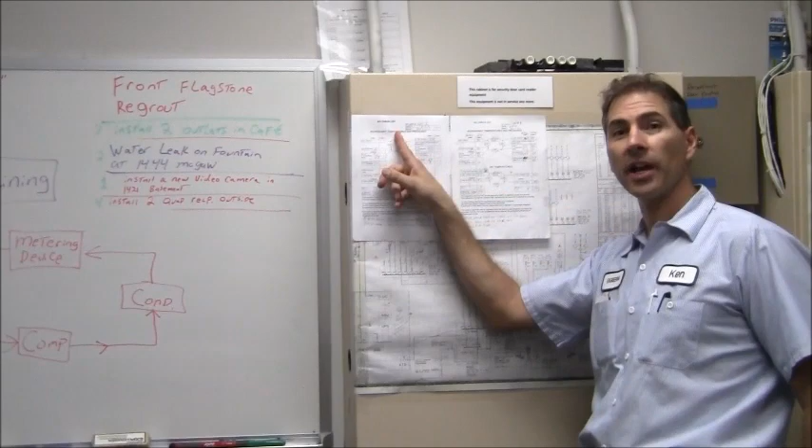Now on my AC checklist, I made a note. The unit I'm working on is called UPS number 1, and I put the date that I found the leak, 8/8/14, found refrigerant leak on the evap coil.

8/11/14, I added 1 can of Super Seal to the system. Now the next question I want to ask myself is: do I want to put a little bit of refrigerant in the system at this time?

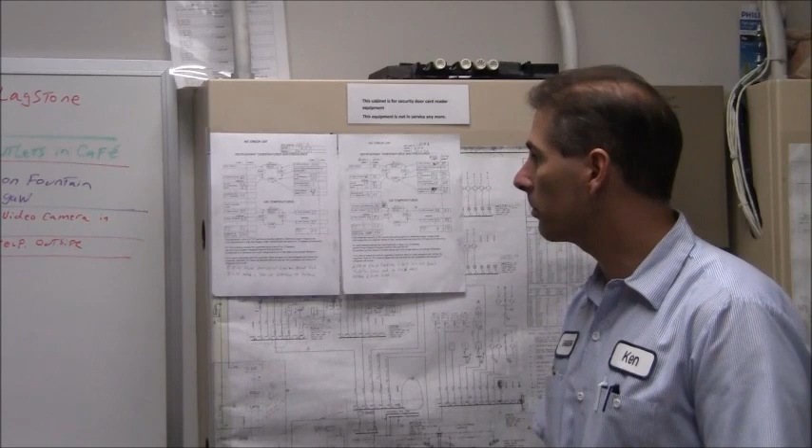Looking at my numbers, I know my superheat level is a little on the warm side at 35. The last time I touched the system on 2/14/14, I had a superheat of 15 degrees, which is a much more reasonable number with no bubbles in the sight glass. But because all I did was add 1 can of Super Seal to the system, this is what I'm going to do.

I'm going to leave the system alone. I'm going to run the system and run it hard.

There are 4 units in this UPS room. This is UPS number 1. I took the thermostat set point and dropped this one to 72, and the other ones are either at 73 or 74 degrees Fahrenheit.

So this unit is definitely going to run more for the next 30 days than the other units. What I'll do is make a note on my calendar, and in 30 days I'll shut the unit down and check that evap coil where the leak is to see if I've sealed it up.

If I have sealed it up in 30 days, I'll go ahead and top off the unit, probably to the point where I simply have no bubbles in the sight glass. Top it off, no bubbles in the sight glass, mark down my readings as the after readings, and then I'm done. Then we just monitor it in the following year and see what happens.

So that's where we're at.

Okay, so that's where we're at, and basically the whole reason I wanted to create this video was to go over the AC checklist and exactly how you fill in all the different things, how I make my notes if I find an anomaly on the system, and then I keep these for further review for a future day.